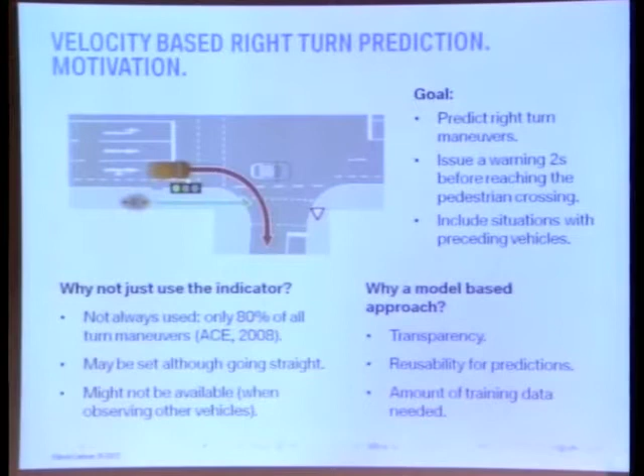Now, there have been a couple of works focusing on this issue in past years. However, the important point is that, in contrast, we would like to include situations with preceding vehicles into our considerations. If you have a preceding vehicle, its velocity profile will influence our own, thereby making the task of velocity-based driver intent prediction much more challenging.

Now, you might wonder, why do we care about the velocity profile in the first place? Why not just use the indicator? Well, as a study of the Auto Club Europa in 2008 has shown, in Germany at least, only in 80% of all cases is the indicator set for turning maneuvers. Also, the indicator might be set although the driver is actually intending to go straight. So the velocity profile could be used to detect this discrepancy.

And last but not least, the indicator signal might just not be available, which is the case if we want to reason about other vehicles that we can only observe from the outside.

Also, you might wonder why we chose a model-based approach rather than a support vector machine or a neural network. In fact, we're using both in other applications, and they are certainly very powerful machine learning tools. However, they also have weaknesses, which is their lack of transparency, and that the results we obtain cannot be used to make predictions about the future as easily as with an explicit model.

Also, I talked about including a preceding vehicle into our considerations. So if we have all the possible trajectories of a preceding vehicle and all possible trajectories of our own, we've got a very big space of possible inputs to our system. So we would need a lot of training data for a non-heuristic model to generalize well to arbitrary situations.

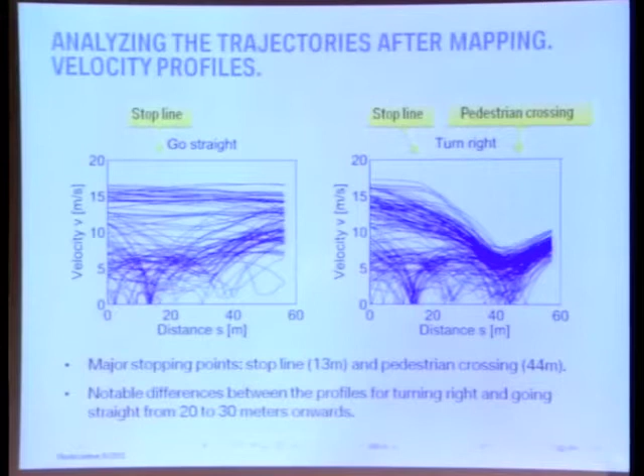In this context, we are using the intelligent driver model first published by Treiber, Hennecke, and Helbing in 2000. It basically models driver behavior using two terms. One is characterized by a maximum acceleration parameter A, the actual velocity V, and a desired velocity U, corresponding to free driving behavior. The second term models car following behavior, characterized by a desired gap D star and the actual gap D with respect to the preceding vehicle.

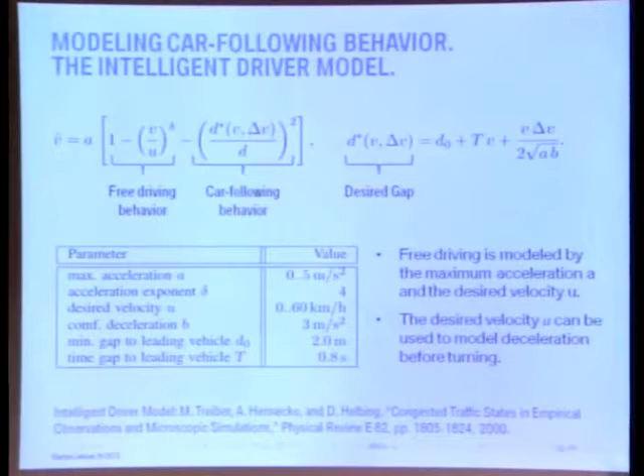Now, in a typical instantiation of the model, the desired velocity U is a constant. For our purposes, however, we need the desired velocity U to model the turn-related deceleration of the driver before doing a right turn. So what we do is take the first term of the equation and rewrite it to obtain a desired velocity profile that is dependent on our distance variable s.

Using a single sample trajectory that characterizes typical driver behavior, like the one here, we can obtain the desired velocity profile for this trajectory. As you will notice, we need the parameter A, which can be estimated based on the acceleration phase after completing the turn.

So now you might wonder, what do we need the desired velocity profile for? As it turns out, desired velocity profiles generalize very well to arbitrary situations.

Let's say we take a virtual zero velocity obstacle and place it at the stop line of the traffic light. Then we start a simulation using the IDM equation starting with 8 meters per second, and what we get is a red trajectory here. Once we reach velocity zero, we remove the obstacle, and we get the second part of the red trajectory. If you compare this with trajectories we actually observed of vehicles stopping at the traffic light, it matches very well, although the desired velocity profile used for this simulation has actually been obtained from a completely different trajectory.

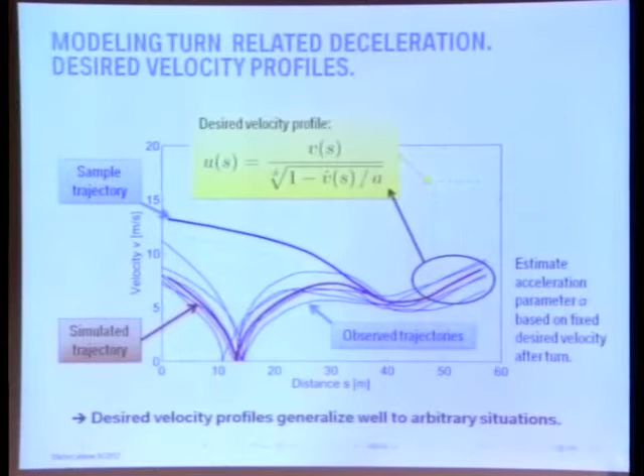Now, of course, we didn't just use one single intersection crossing to obtain our driver model. Instead, we used 50 right turn maneuvers. For each of them, we calculated the desired velocity profile and the corresponding parameter A, and we clustered them using k-means into 3 different driver behaviors, each with their own distribution of the parameter A.

As you will see, we used 4 different driver intents: one for going straight, one for stopping at the stop line of the traffic light, one for turning right, and one for turning right but stopping before crossing the intersection's pedestrian crossing. Altogether we got 24 hypotheses, each corresponding to one of those intents and a set of parameters.

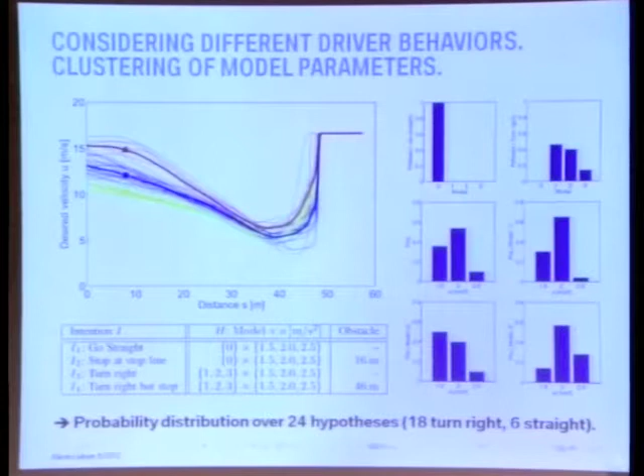So basically, having those intentions and hypotheses, the problem of driver intent inference boils down to calculating probabilities for each of those hypotheses, given a not yet defined observation O. The reason I haven't defined this observation yet is that there are a lot of different possibilities for how to define it. In this paper, we investigated two of them.

For the first one, we'd like to rewrite the probability for a hypothesis given the observation as a product of the prior probability for this hypothesis, which can be obtained from the statistics of the previous slide, and some term which is basically the likelihood of our measurement given the hypothesis.

So what we can do now is use a simulation-based approach. Starting from some point in time, let's say when we reach a distance of 30 meters, we go back in time for 1 second, consider the velocity and distance values at that point, and then start a simulation from 1 second in the past up to the current point in time for each of the hypotheses, which you see here. Then we take the final values and calculate the probability of our observation based on the distance between the final value and our actual driver behavior, which can also be seen as a bivariate Gaussian distribution.

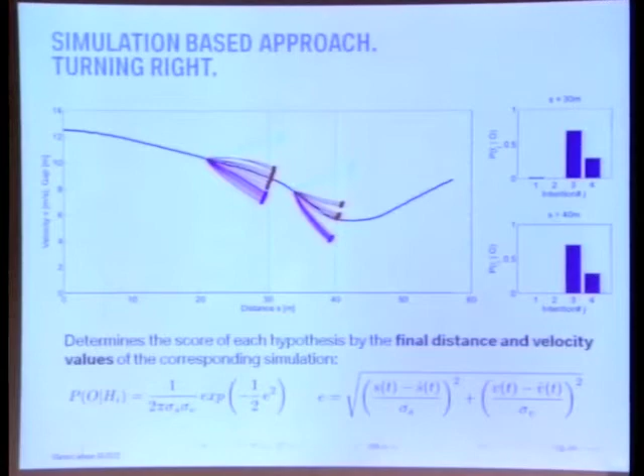Now it's much more complicated when you look at the case of a preceding vehicle. The black line indicates the gap between our own and the preceding vehicle. As you can see, we're approaching the stop line of the traffic light. We both have to wait in front of the traffic light, and then we accelerate. I'm following my preceding vehicle, and finally, the preceding vehicle turns right, and we can accelerate so as to go straight.

Now, what you can see in the simulation runs is that for a distance of 28 meters, all the hypotheses, or the simulation results for all the hypotheses, actually look the same, which is because our own driver's behavior is dominated by that of the preceding vehicle.

So it's actually not possible to say anything about his intents, which is reflected in the probabilities we see above. On the other hand, if you look at the simulation run for 36 meters, then the preceding vehicle has turned.

We have no preceding vehicle anymore. The driver is accelerating, and the only hypotheses that fit this behavior now are the hypotheses that correspond to the intent of going straight, which is reflected in the simulation results. Again, we have a very high probability for going straight.

So to put all this together, as you can see, this approach is able to express ignorance in situations where it's just not possible to say anything about the driver's intent, but still it's possible to say something at a certain point of time, to a certain extent.

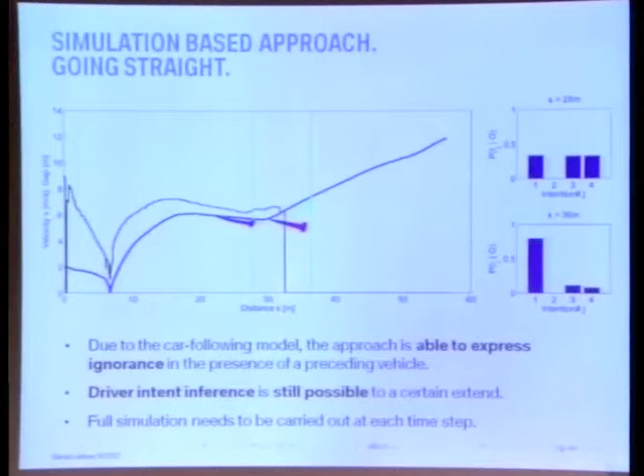And this is the so-called comparison-based approach. The comparison-based approach simply compares the values that we observe, the acceleration values that we observe, with the values we get from the IDM model. And it does this at every time step.

So for each time step, we get a separate observation O, which, because it's a time series, depend on each other. So actually, we don't want to model this as a complete Bayes net, because we have all these interdependencies that would be very complicated.

Instead, we consider just a naive Bayes net, and we model the probability for a given hypothesis as basically the moving average of the scores for the individual time steps weighted by the prior probability for this hypothesis. And it turns out that this approach is much, much faster because the constituent scores can be reused all over again.

As it's a moving average, we only have to compute the newest score for the newest values of our acceleration. And also, it's more robust with noisy sensor data, because if we have a false positive detection of a preceding vehicle on only one time step...

...then the influence of this time step is just influencing our overall probability by a factor of 1 over n.

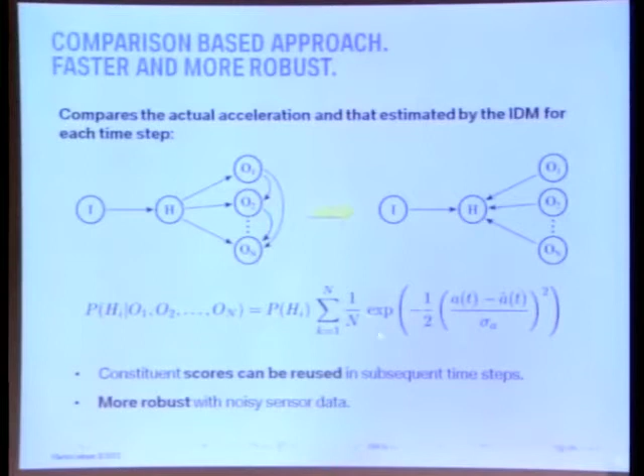Comparing the two results, we see that they basically deliver similar results, and that even at very, very low false positive rates, we can still...

...classify around, or detect around, 50% of our right turn maneuvers in the presence of a preceding vehicle, while obtaining a perfect score, you can't really see it, in the case of no preceding vehicle.

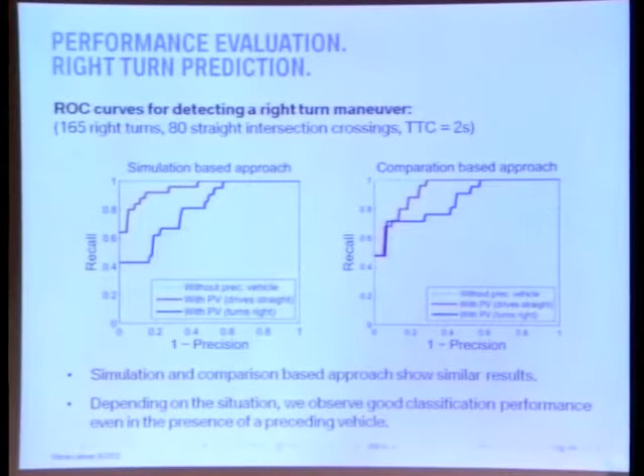Another interesting aspect of using an explicit model, as I said before, is that you can do predictions about the future.

In the simulation-based approach, we simulated the driver behavior for the time interval of 1 second ago up to the current point of time. So there's nothing to stop us from simulating the driver behavior from our current point of time up to 2 seconds in the future, so as to see whether we can reach the pedestrian crossing within this 2...

...seconds. So this is very important if you want to design a driver assistance system, because the driver assistance system has to decide at some point to issue a warning.

So it's not possible for this situation to use a constant velocity-based approach, because the driver is going to slow down before the intersection.

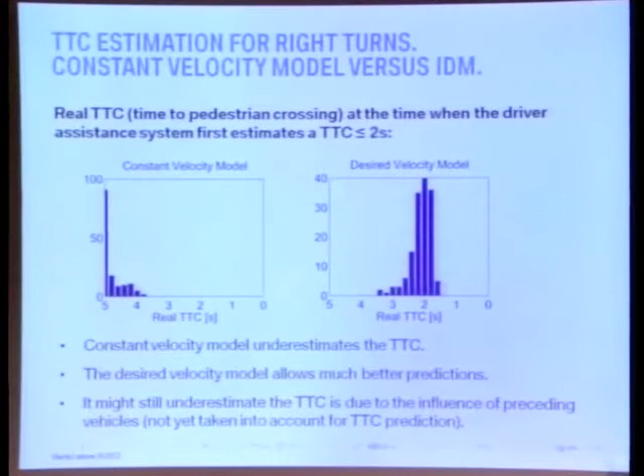To sum up, I introduced an IDM-based approach to driver intent inference, which is very simple and real-time capable.

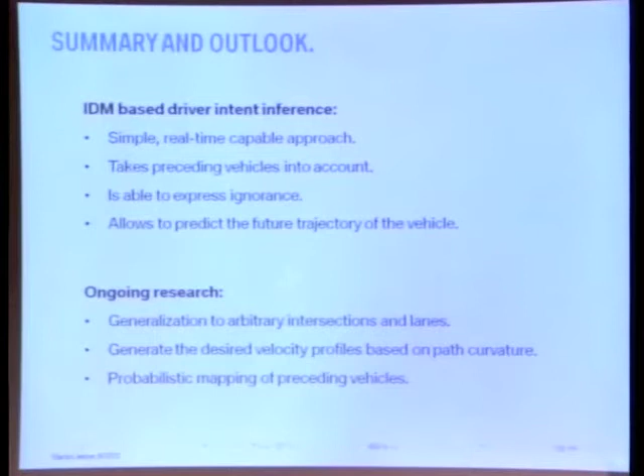It takes into account the preceding vehicles, and it's able to express ignorance in situations where it's just not possible to say anything about the driver's intent based on the velocity profile alone, which is important if you want to...

...combine this approach and include other features like the indicator. Also, it allows us to predict the time to collision, which is important for the design of driver assistance systems.

Ongoing research focuses on the generalization to arbitrary intersections and multiple lanes, and how to generate the desired velocity profiles based on the path curvature.

Also, we would like to have a probabilistic mapping of the preceding vehicle. Sometimes the preceding vehicle is somehow between the 2 lanes, so if you do a deterministic approach, then you might get the wrong results.

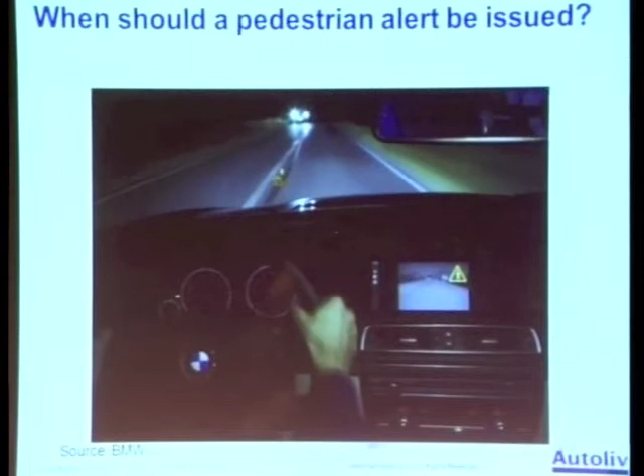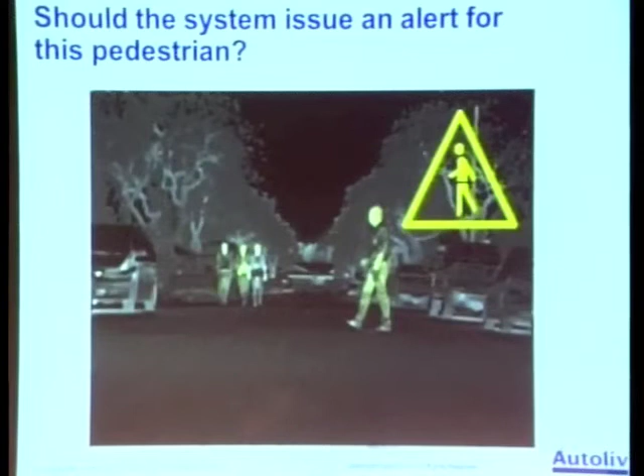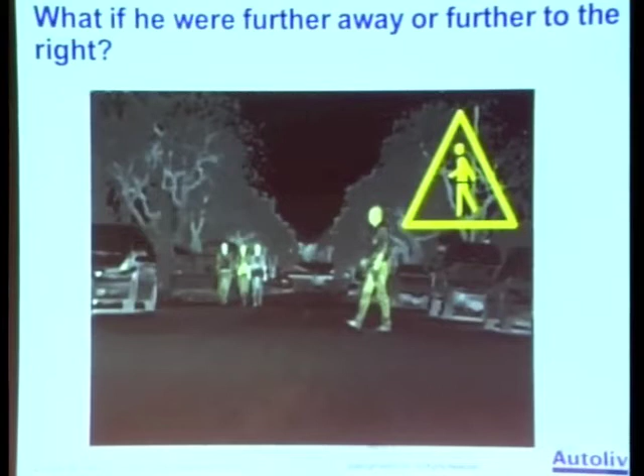Should a system issue an alert for this pedestrian? Or this pedestrian? What if the pedestrian will be further away or further to the right? Would you still issue an alert?

There are different systems on the market. I just take here two examples. Daimler introduced Night View Assist Plus in the E-Class in 2009, and BMW introduced what we refer to as Night Vision 2 with the 7 Series in October 2008. They have different characteristics, but the main thing here is that they both recognize and detect and warn for pedestrians.

The functionality of the system is that you have a camera. You have a camera here up in the corner. In this case, it's a far infrared camera.

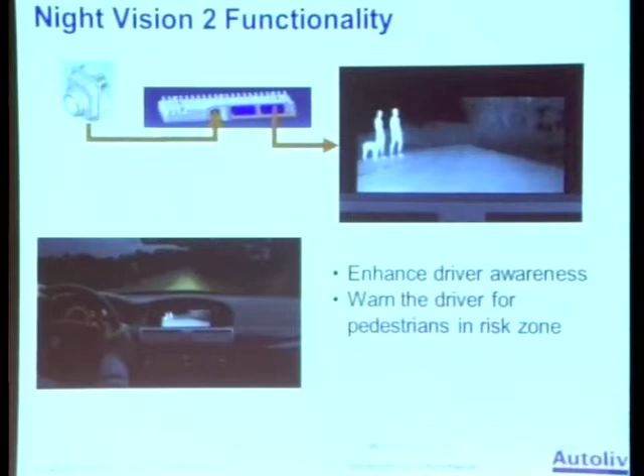You have a camera, you run it to a computer running some image processing, and it's out to a display. Of course, here in the BMW, it's a display in the center console. The system is there to enhance the driver awareness of the situation and also warn the driver of pedestrians in the risk zone.

And when such pedestrians are recognized, they are marked in various ways. Here I boxed them, but you can also highlight them by coloring them in, and you issue a warning. The question here is, what is the risk zone? And that's what we have studied here.

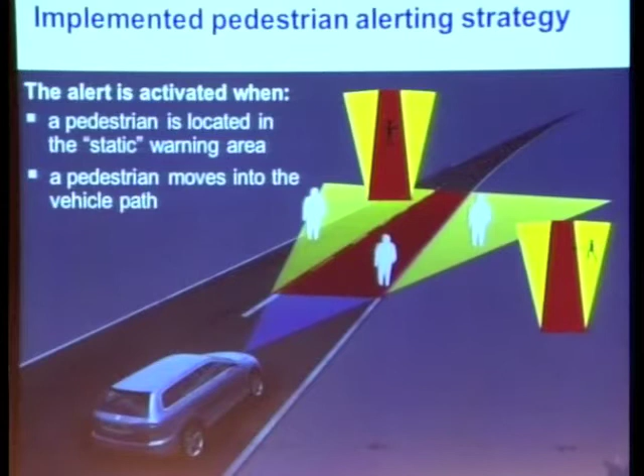There is an implemented pedestrian alerting strategy that I started from. The alert is activated when a pedestrian is located in the static warning region, the red zone, meaning that the pedestrian is straight in front of the vehicle's intended path. But you also issue a warning if a pedestrian moves into the vehicle path from the yellow zones here, so they would be in the vehicle's path when the vehicle is about to enter that area.

The warning parameters are also adjusted speed dependent, and I think that they are all perfectly logical. I started off here with more assumptions of how to define the width and the size of the red zones and the yellow zones, and how the transition is looking. That was my initial assumption.

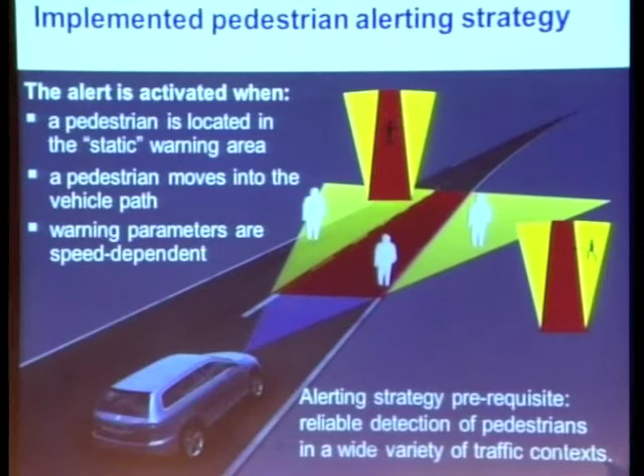Of course, here in alerting strategies, the prerequisite is that we assume perfect detection. That's of course an ideal situation that we are not quite there yet, but here we are assuming perfect detection. What do you do once you have detected the pedestrians accurately? And how do you then issue an alert in a wide variety of traffic contexts?

Context may influence alerting criteria. The appropriateness of alerts may depend on the driving context. Drivers may rate favorably in alarming situations even when they were able to avoid the accident without an alert. And we suggest that alerting strategies must take into account this aspect, that the contextual factors shape drivers' attitudes towards the situation in which the system issues an alert.

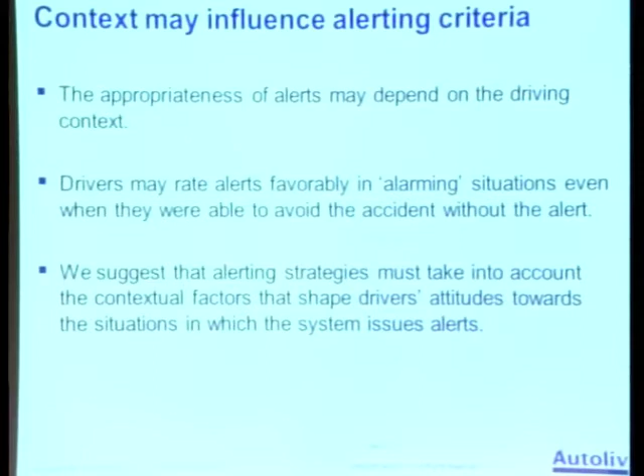And the challenge then is to define adequate activation criteria. Here we have a pedestrian on the road, and the system decides to issue an alert in this case. If you fail to issue an alert when alert is justified, you have an immediate accident risk, and of course we want to avoid that.

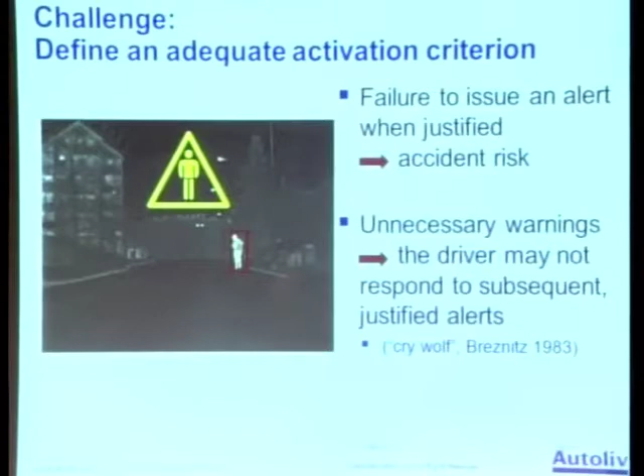But if you issue an alert that's considered to be unjustified or unnecessary, even though it's a perfectly valid detection, you run the risk, if you have repeated such warnings, that the driver will fail to respond when he or she really needs to respond. And it's generally referred to as cry wolf, and you have a good reference there.

The issues and research questions we have here are: when should the pedestrian detection system issue an alert or warning in order to gain driver acceptance? And can we demonstrate the utility of a method that uses drivers' subjective acceptance as a criteria to guide the development?

So basically we turn it around. Instead of trying to define an objective criteria that can be difficult to see, because most people will very rarely experience a situation with immediate risk of hitting a pedestrian, most of our experience with the system is situations that might develop into an accident. So we suggest it's more appropriate to look at how you gain acceptance for those situations.

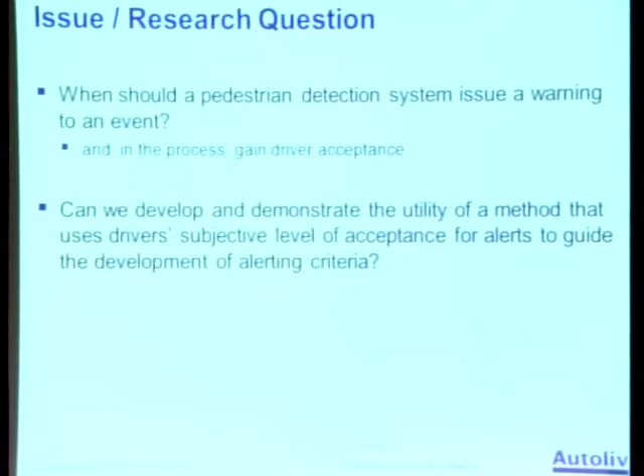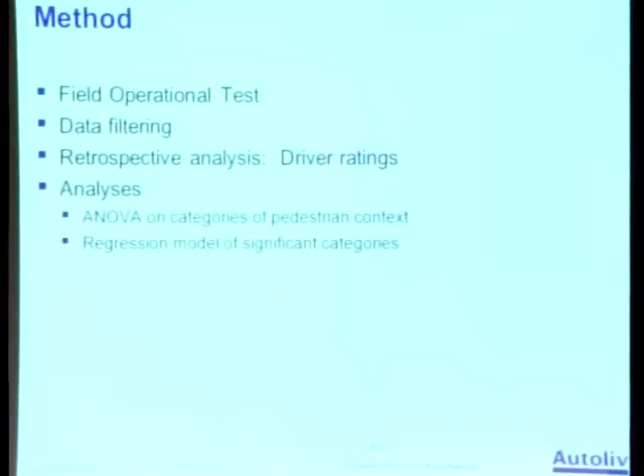So you're basically using a subjective criteria to see if that can guide us in defining objective alerting criteria. The methods we used were a field operational test, data filtering using a retrospective analysis to gain driver ratings, and then ANOVA analysis and regressions on that data.

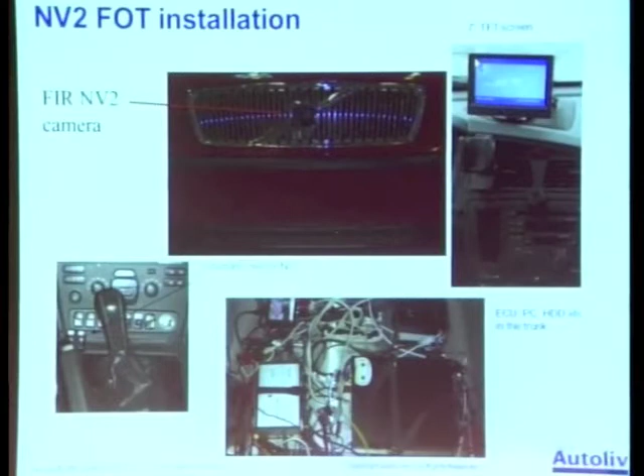The field operational test was basically to put the system into a number of vehicles we had available. They were retrofitted - in this case it was a Volvo, and since there were no such systems, we had to put a special add-on screen. We threw the PC and some other data acquisition equipment in the trunk, and then we started to record systems, recording actual pedestrian encounters in the field.

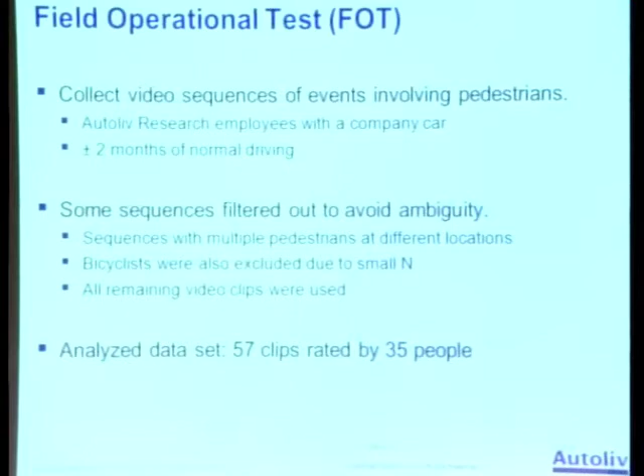We used company employees that had a company car, and in this first set we had roughly 2 months of normal driving. We took all the sequences we could get, but some had to be filtered out because of ambiguity - for instance, pedestrians at 2 different locations in the same event, where you don't know which pedestrian to rate or if there was a combined effect. We also excluded bicyclists since we didn't have enough data to do a separate analysis, assuming there would be different risk criteria for bicyclists compared to pedestrians. We used all remaining clips, which ended up being 57 clips, and we used 35 people to rate them.

The retrospective analysis involved having volunteers watch and rate each clip one at a time. The clips were randomized, of course, in order to avoid any sequence effects.

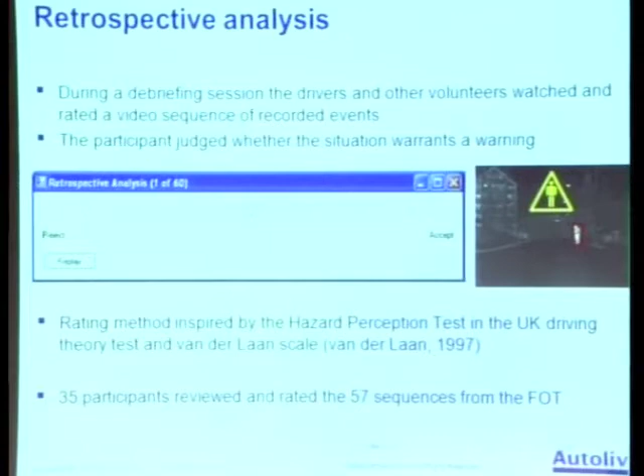We asked a very simple question. We showed the clip, and when it stopped, we showed the screen with the question: do you want to have an alert or not in this case? How do you accept it? If you definitely do not want to react, you move the mouse to indicate you do not want an alert in this case whatsoever. And if you definitely want one, you do the opposite.

Most of the situations, however, were not so clear. It wouldn't have been a good experiment if all were accept and all were reject. So most of them were somewhere in between.

The method we developed is inspired by the hazard perception test used in the UK driving test, and also the Van der Laan scale, but simplified to be only one scale. All of the participants rated all the sequences.

For drivers and the lab subjects, we separated those that had been driving with the system from those that hadn't driven with the system, to see if there was any difference.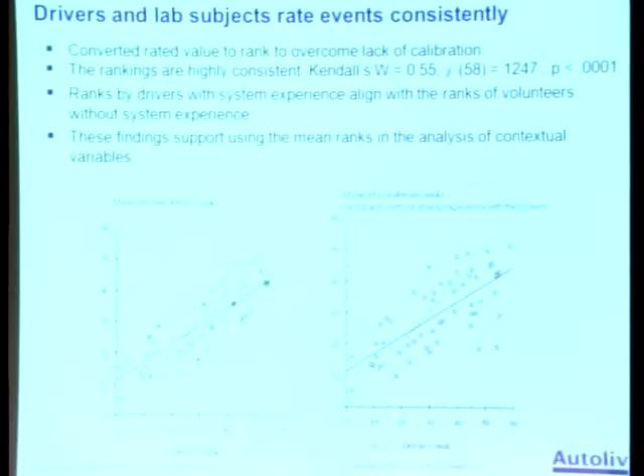Ranks from drivers with system experience aligned with the ranks of volunteers without system experience, which is important because it makes it easier to recruit people for this rating. These findings support that we can use the mean ranks in the continued analysis as a desired outcome.

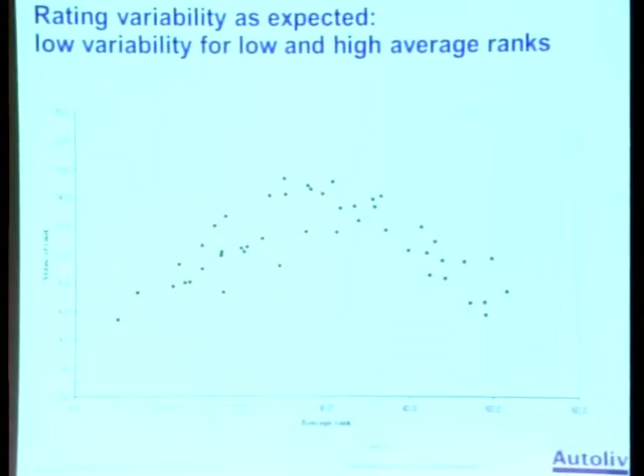We can also see here the standard deviation on the y-axis, and here the average rank. So the case of these 57 sequences that was ranked the highest, and so forth. It's expected that events that were in between had more variability than ranks generally ranked very low or very high, which is another good confirmation of the data collected.

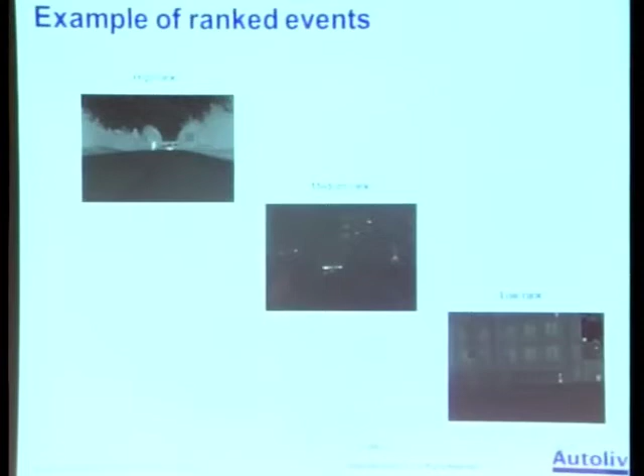Examples of ranked events, of course still images. Here we have a high rank. It's a pedestrian. There's a car coming at about 90 kilometers per hour, and there's a pedestrian dashing over the road. If the pedestrian would slow down, you would hit them, but the pedestrian doesn't slow down here. It's difficult to know at the time when you issue the alert for the driver, and it was very consistent.

Here is a medium rank one. There's a pedestrian coming to a zebra crossing. The projector doesn't generally give very good credit to some of the images here in black and white. There's a car in front, and if the car in front doesn't slow down, and if the pedestrian keeps his pace, we will pass before the pedestrian comes here. But if the car in front slows down, or if the pedestrian speeds up, we would have to brake for him. So it was kind of indecisive, and it was also very consistent to be medium rank.

Here you have a pedestrian in the middle of the road, which would be in the red zone I showed in the beginning. But people consistently saw that the road is curving and the pedestrian is actually on the other side of the road. On the original images, we didn't do it with this type of projector, so it was more clearly seen with the quality of the image where the pedestrian was.

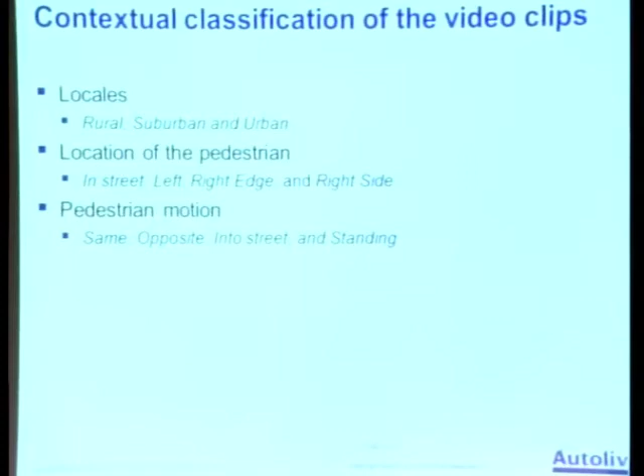We then classified and annotated them according to a number of criteria we thought would be useful and has been discussed in the past. Locale: we rated whether they were rural, suburban, or urban. Urban had to be continuous buildings. Suburban was not continuous buildings, but we used street lights as a criteria. Rural would be, of course, no street lights.

We also used the location of the pedestrian, whether they were in the street, on the left side of the road, on the right edge of the road meaning on the road but on the edge, or on the right side meaning on the sidewalk or beyond it. We also categorized motion, whether they were moving in the same or opposite direction of your own vehicle, whether they were moving into the street, or whether they were standing.

We could then conduct non-parametric ANOVAs on this, because it's on ordinal scales. We found that pedestrian location, pedestrians in the street were ranked high, and also on the right edge, and they were highly significant. Pedestrians moving into the street were ranked high, but also pedestrians standing, since pedestrians standing near the side of the road can at any time walk out into the street. So they were basically rated in the same way.

There was actually a difference between whether the pedestrians were walking in the same direction or the opposite direction. We think there are other factors we need to separate in this, so we are doing another study with more participants, to separate them into more categories. We think it co-varies with something else. It doesn't co-vary with moving whether you are on the left or right side of the road, because they were roughly balanced.

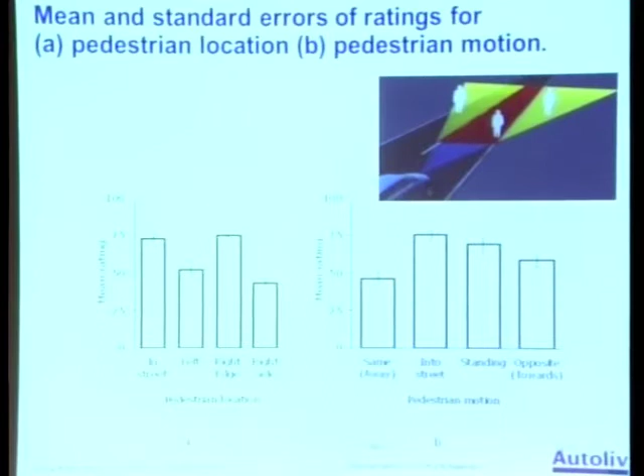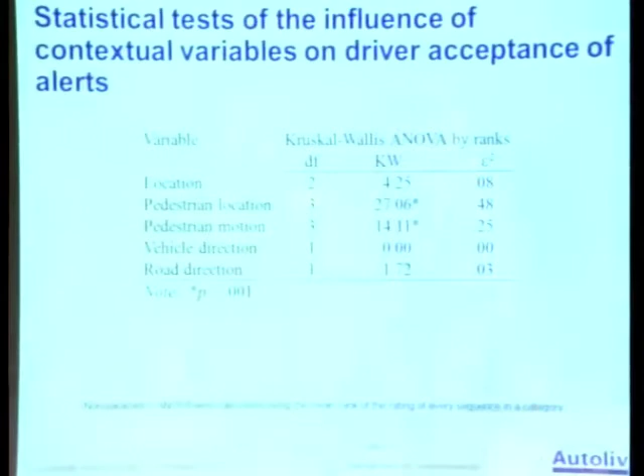Those with an asterisk are significant at 0.001, so it's a very nice significance. We could then generate the best fit linear model of this. The rating has an intercept, and then a high value for location, and location was set to 1 whether you were in the street or on the right edge, and set to 0 if that wasn't the case. We use minimum velocity, and then minimum x direction, meaning the distance in front of you.

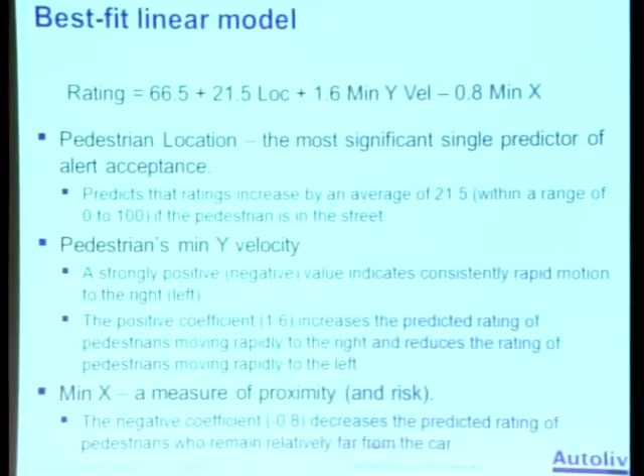So the location was the most significant single predictor of alert acceptance - if they were in the street or on the right edge. Minimum lateral velocity may need some explanation: a strong positive value indicates you're going from left to right. If you were moving rapidly from left to right, you increased the rating. If you were moving rapidly from the right, from your near edge - this was done on right-hand driving - then you decreased the value.

That means if you're on the left side and you move rapidly, you have enough speed to be in the way of the oncoming vehicle by the time it arrives. But if you're on the near side, you actually have time to dash out of the way before the vehicle gets there. Minimum X was also used, and the negative coefficient there means that the further away the pedestrian was, the lower the risk. But you see, it's not a very high weight.

Otherwise, one would assume that the X distance, or the distance in front of the vehicle, would be very important. The 3 parameters explain about 61%, R squared is 0.61 of the variability, and that's a strong result when you're explaining human judgment. There are probably additional parameters we have to look for that would increase the model's validity even more.

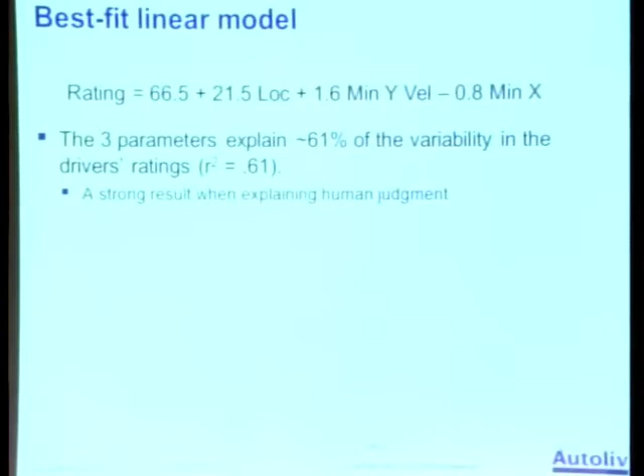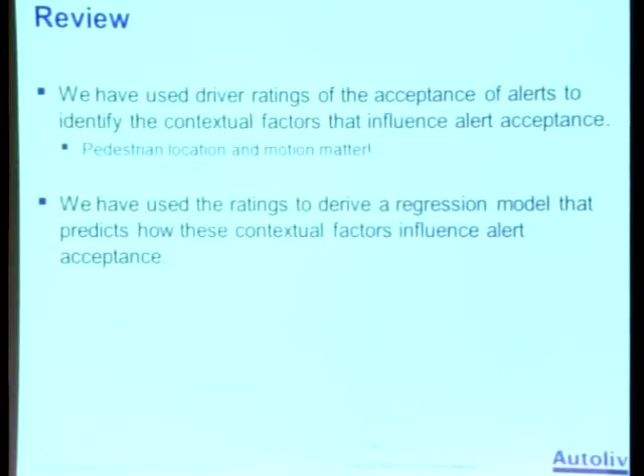So in review, we have used driver ratings of the acceptance of alerts to identify the contextual factors that influence alert acceptance, and pedestrian location and motion does matter. We have used the ratings to derive a regression model that predicts how these contextual factors influence alert acceptance. Our method shows how you can leverage the scarce and expensive FOT data within the confines of the laboratory.

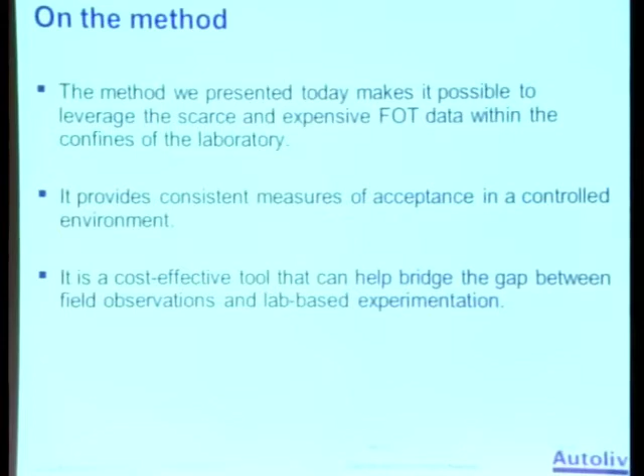So we could actually use the data - each FOT data is unique - and replicate them within a subject study in the lab, which is very important to reduce the cost of this type of exercise. It provides consistent measures of acceptance in a controlled environment. It's a cost-effective tool that can help us bridge the gap between field and lab-based experimentation.

So, lessons learned - what does it mean for our alerting criteria? Well, an alert should be given when the pedestrian is in the middle of the road or at the right edge. I called this the green zone - it was initially yellow, but turned out to be more greenish. So in the green zone: moving rapidly from the left side into the street - the size of the arrow indicates the velocity of the pedestrian - or on the right side and moving slowly into the street.

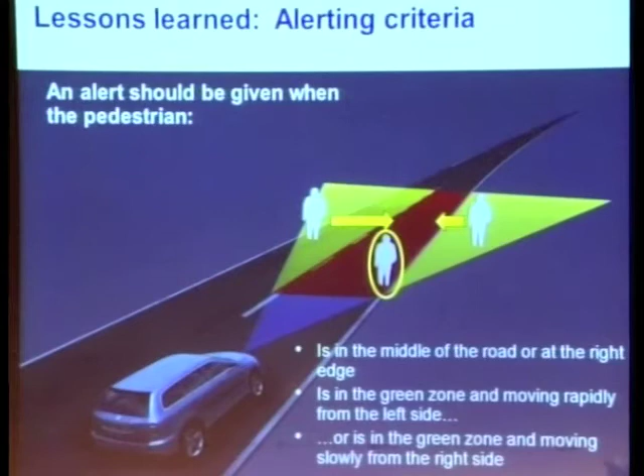And I think this all makes sense. Again, the criteria we started off with was, in my opinion, very sound and logical, but when you see this, well, this also makes sense. This is a way of refining it in a way we didn't have any evidence for before we had done this study.

So it also means that we have intuitive results, and that also adds credibility to the method and the results.

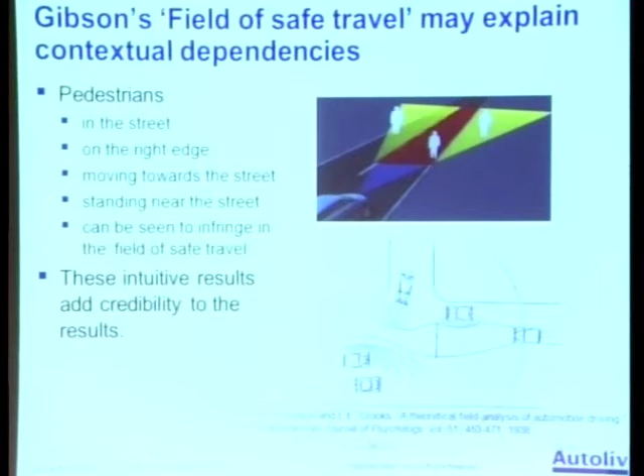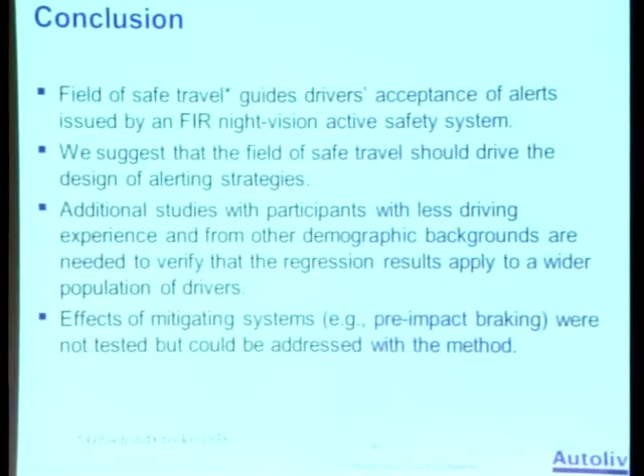So in conclusion, field of safe travel should guide drivers' acceptance of alerts issued by, in this case, a far infrared night vision system, but it is probably extended to all types of pedestrian detection systems - it hasn't been tested though for all types. We suggest that field of safe travel should drive the design of alerting strategies. Additional studies with participants with less driving experience and from other demographic backgrounds are needed to verify that the regression results apply to a wider population of drivers.

And the effects of mitigation systems, for instance pre-impact braking, were not tested, but could be addressed with the method. And by that I close, and if you have any questions, I'd be glad to answer.

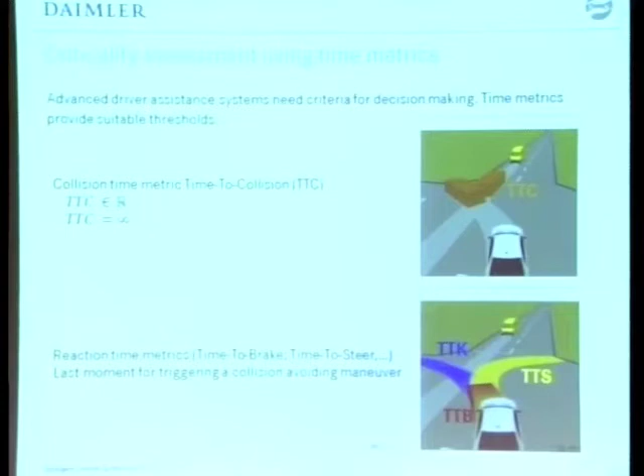For the last speech today, I will present you a novel approach for the probabilistic computation of time to collision. So, as a quick reminder, I will present time metrics which are good criteria for criticality assessment. The first time metric is time to collision, and there are also other time metrics such as time to brake and time to steer, which represent the last moment for triggering a collision avoidance maneuver.

So if we consider non-probabilistic systems, we just use a single-valued state for the objects, which leads to a crisp value for the time metric. Here, as an example, TTC has just one value, and the reaction time metric TTR also has one value. And this can lead to unrobust behavior, as shown in this video.

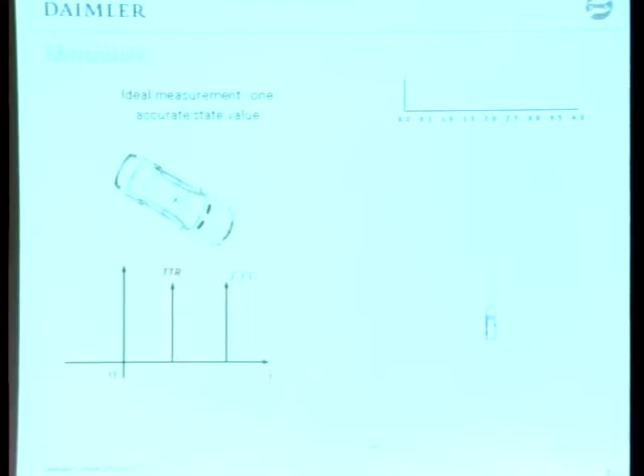So what's displayed here is an actual measurement. On top, you see a graph with the evolution of the time metric, and the red, yellow rectangle is a measured object acquired with sensor fusion, and here you see the ego vehicle. And here a collision is detected, and the avoiding maneuver is also displayed here.

And in that case, after a few seconds, the collision actually disappears and then comes back again. And if you consider the situation, if the yellow vehicle was further left by a few centimeters, let's say 50 centimeters, then the collision wouldn't disappear, and the difference between the two situations is not so big. So it's kind of an unrobust behavior.

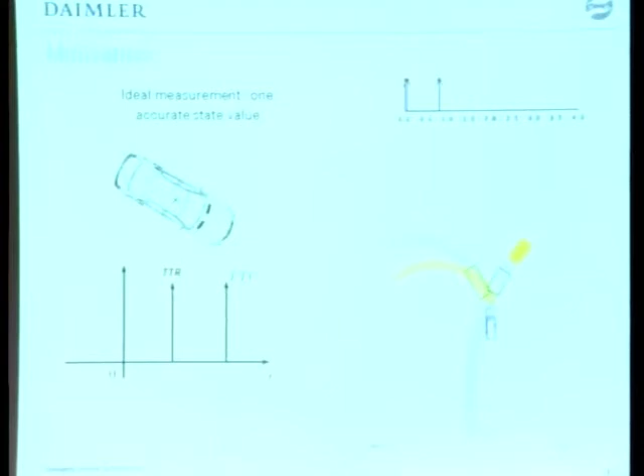And another focus for this new method is also to account for the restricted computation resources in advanced systems. So in the design of this method, there was a big effort on efficiency.

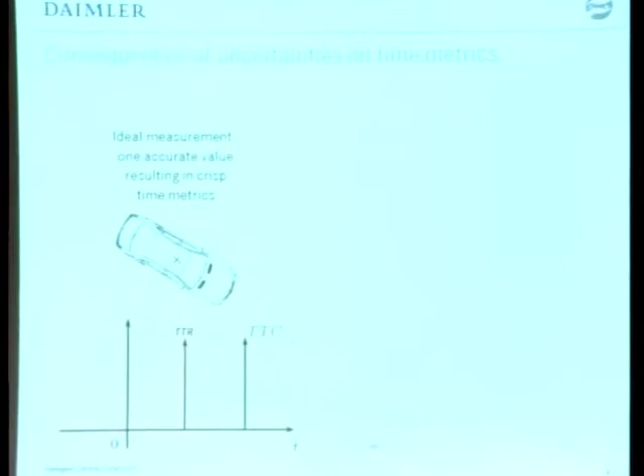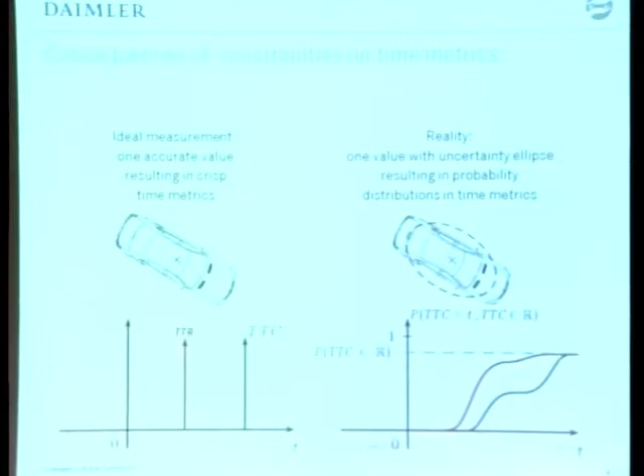So here again, let's take a look at the consequence of uncertainties on the time metric. On the left, you can see the crisp values for single-valued states. And if you consider the uncertainty about the states, the time metrics are transformed into a probability distribution. And this probability distribution is also scaled with the collision probability. So computing this collision probability is also an important step in determining the distribution probability for the time metric.

So this is why I will present the method for computing the collision probability. I already presented this method last year, so I may go quickly, but I present it again because it's really important for the next computation. So in order to compute the collision probability, we introduced a distance function in the time to collision computation algorithm with the following characteristics.

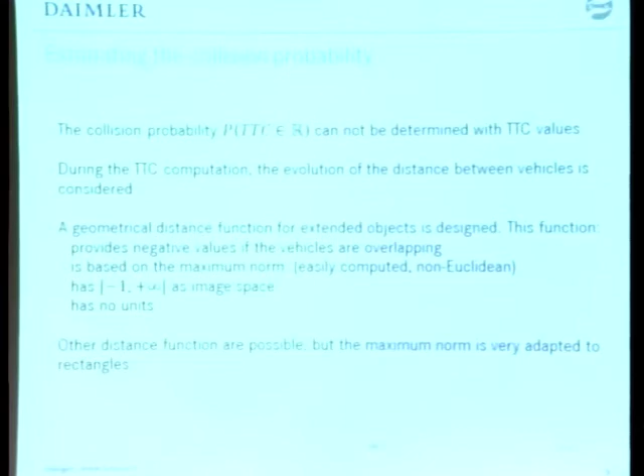So the distance function provides negative values if two vehicles are overlapping, meaning they have collided. This function is also based on the maximum norm because it's easily computed and adapted to rectangles. As a consequence, this distance function ranges from -1 to +infinity.

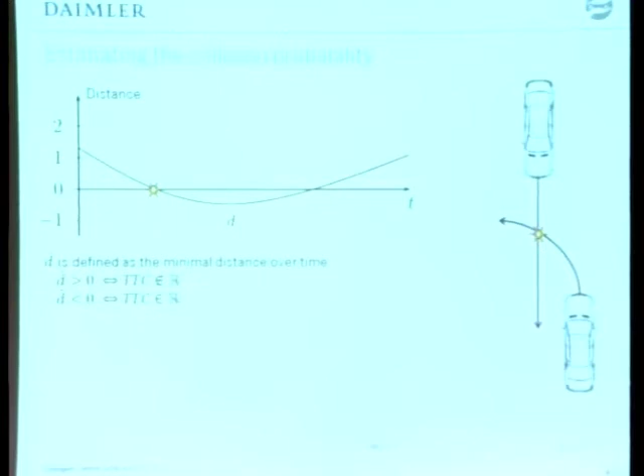If we take a look at the situation, on the right I've depicted a crossing situation with two trajectories displayed, and on the graph on the left you can see the distance evolution over time between the two vehicles. In case there is no collision, so the distance minimum, symbolized with a small d, remains positive. But in case of a collision, the distance minimum is then negative.

So by studying the probability distribution of this distance minimum, we can also compute the collision probability, because the collision probability is also the probability that the distance minimum is negative.

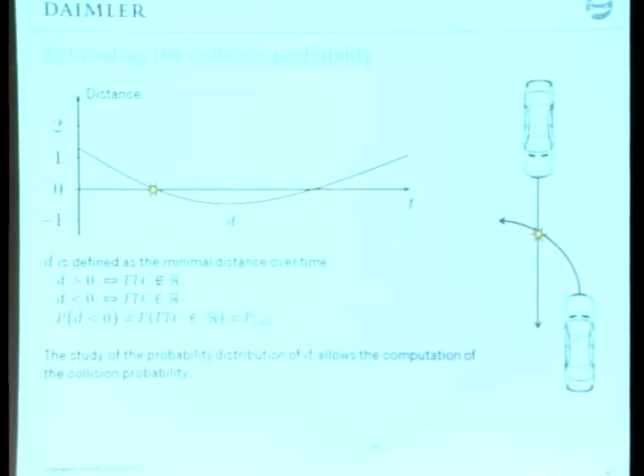So first of all, we take an object with a state and also an uncertainty about this state, represented by the covariance matrix sigma. And we want to study the probability distribution of the minimum distance.

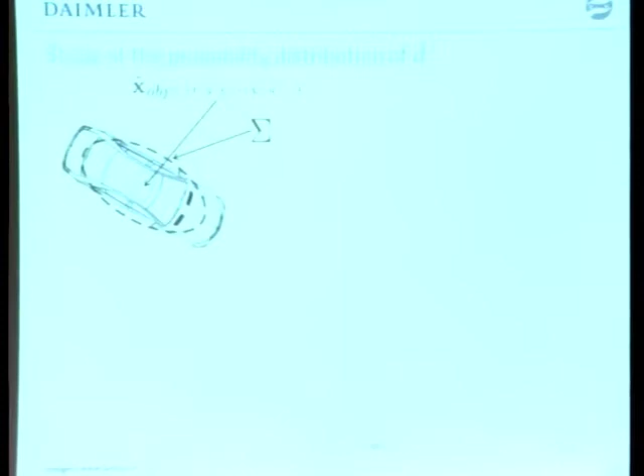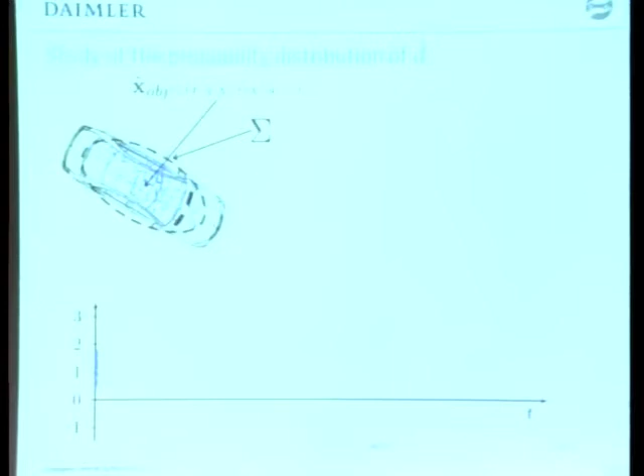So for that, we first make a Monte Carlo simulation, only to know how the distribution looks like. So we draw thousands of samples, and for each sample, there is an initial distance displayed on the left. Also for each sample, we perform a TTC computation, which gives us distance evolution curves, and for each curve we can also get the minimal distance.

So for an online assistance system, the Monte Carlo simulation is a bit of a no-go. So we used an approximation method, the Unscented Transform. Some of you may know it from the Unscented Kalman filter. So we just compute a very few samples deterministically, depending on the state and the covariance matrix.

And for each sample, we perform a TTC computation algorithm. Each sample leads to a distance minimum value, from which we can compute the mean and the variance. Using the model we isolated from the Monte Carlo simulation, we can approximate the distribution very well. Then by integrating from -1 to 0, we can also compute the collision probability.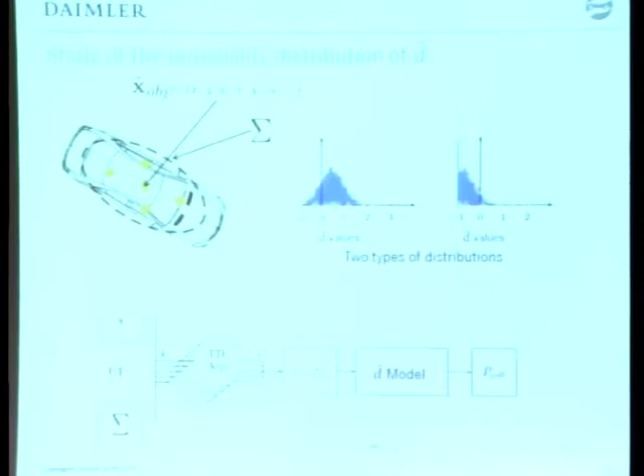So now the question is how to approximate this curve, which is the actual probability distribution of TTC. If we consider the Bayes' rule, we can split this equation into two members. On the right, the collision probability is already known, and we just have to find an estimate for the conditional probability.

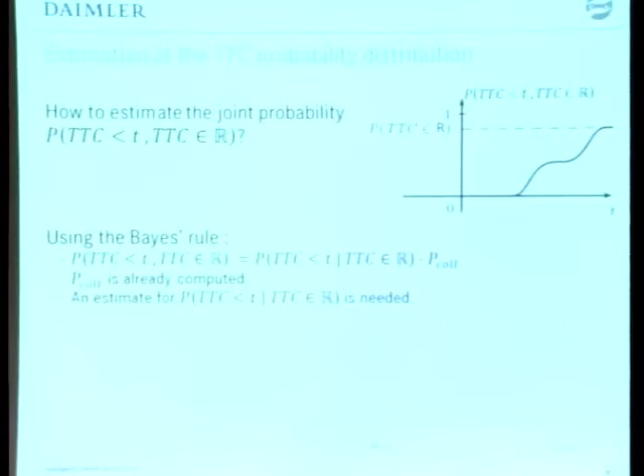So we just have to find an estimate. But the problem is, for example, each sigma point doesn't lead to a collision, so it's hard to compute this conditional probability just using TTC values.

And the trick is to use a pseudo-time matrix, defined as this underline-overline TTC. This pseudo-time matrix equals TTC if there is a collision, and equals the time of minimal distance if there is no collision. Here the time of minimal distance is displayed on the graph, so it's the time when the minimal distance is reached.

And as you can see, the quality of approximation increases with the collision probability, because if we have a high collision probability, then the proportion of TTC values in the pseudo-time matrix is very high. This is also a good approximation because in case of a low collision probability, the approximation error will be minimized when we multiply this term with the collision probability.

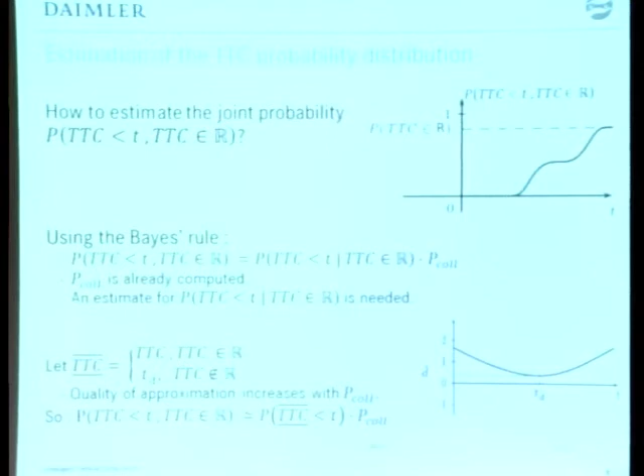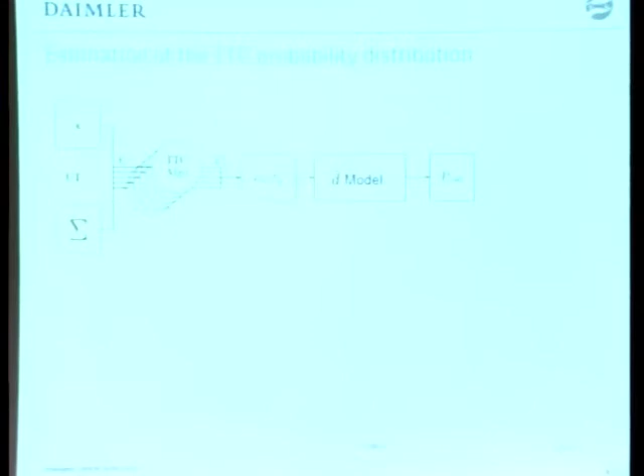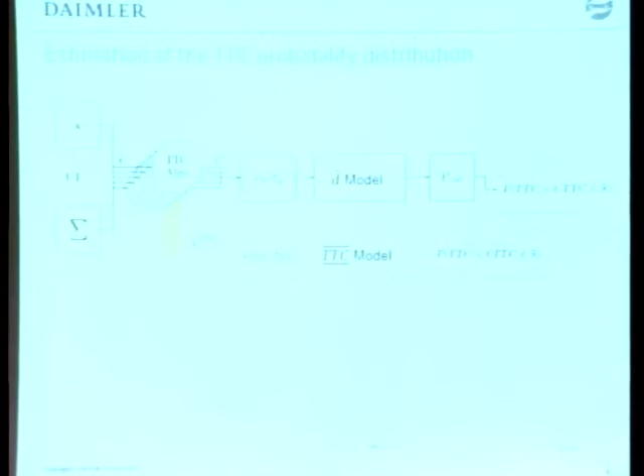So here let's take a look at this flow diagram. You remember it's a flow diagram for computing the collision probability. And here is the overhead for computing the whole distribution of time to collision. So we just have to extract the pseudo-time matrix values here from the computation of the TTC values.

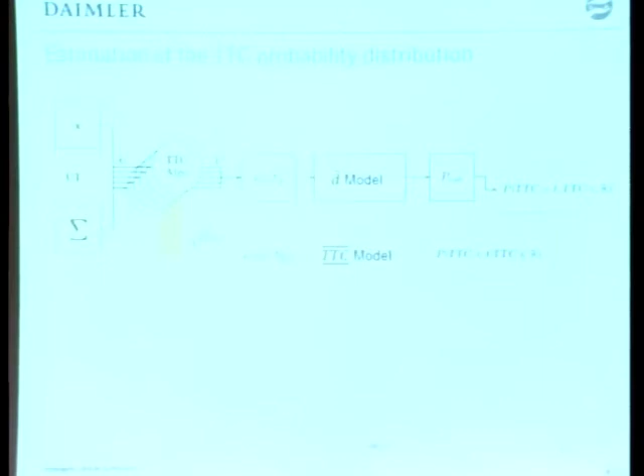Again, performing Monte Carlo simulation, we could compute models for the pseudo-time matrix. Using the mean and variance, we can compute the corresponding parameters from this model and then compute the TTC distribution. The important fact about this graph is that most of the computation is already done, because it occurs by computing the TTC values, also the TTC algorithm, which is already done when we want to compute the collision probability.

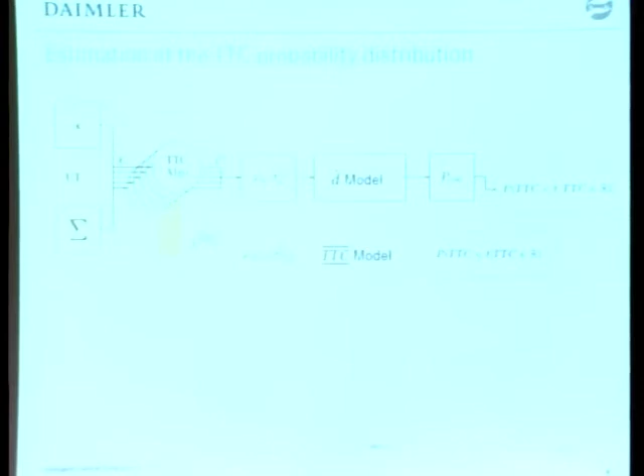And because we introduced a pseudo-time matrix, we don't have to perform any additional calls to the TTC computation algorithm.

So now let's take a look at the results, as a comparison between the non-probabilistic system and the probabilistic system.

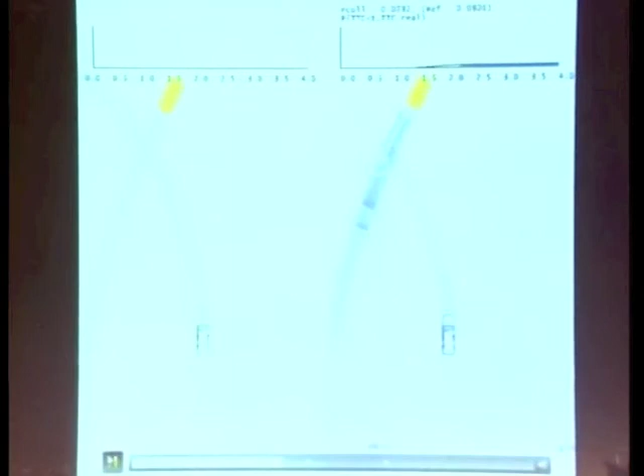Here we come to the part when the collision is detected on the left, and here we also have a collision probability of 98%, while the real collision probability is 95%, so it's a really good approximation.

You can see that here the TTC was about 1.4 seconds, and it actually already begins at 1 second and goes up.

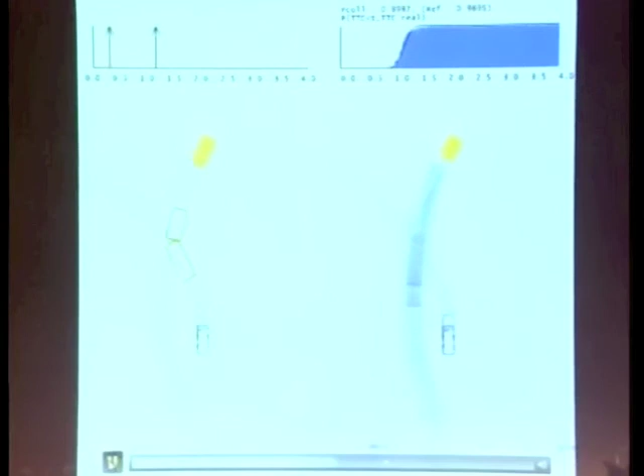Then when we lose track of the collision, because the object is deviating a little bit, you see here that the collision probability is far from zero, it's still 30%. So using this new method, you can increase reliability in your criticality assessment.

So here, when the collision comes again, there is no way anymore to avoid it, and you see it's linear in time, and you have fast 100% collision probability.

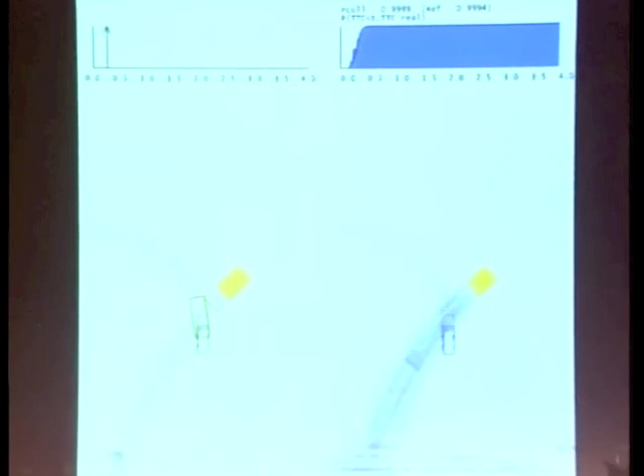As a conclusion, I presented a novel and efficient algorithm for estimating the collision probability, also the probability distribution of TTC. I studied the influence of sensor uncertainties on time metrics, designed a distribution model regarding Monte Carlo simulation, and used an efficient approximation method to approximate this distribution.

I forgot to mention that this algorithm can also incorporate situation-specific sensor uncertainty because it takes the covariance matrix directly from the Kalman filter, and it's regularly updated.

It's also real-time capable, so I made some computation time comparisons. If you use Monte Carlo, the estimation of this histogram took about 1.5 seconds, while using the uncertainty transform it took about 2 milliseconds for a covariance matrix of dimension 6. If you just have uncertainty on the position, it just takes 0.9 milliseconds.

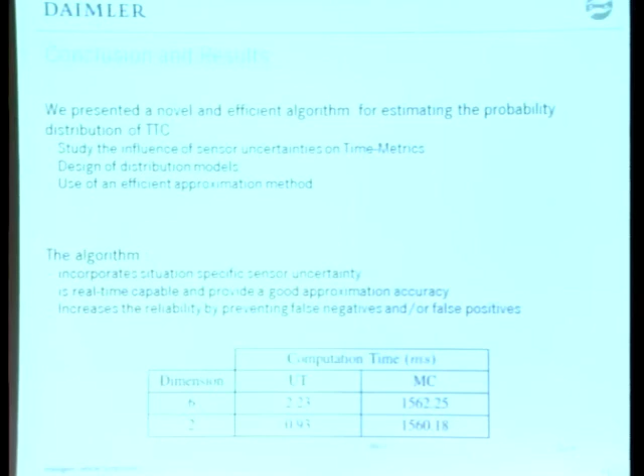For future work, I will extend the presented approach to situations with multiple objects. Here I have made a small example: a crossing situation with 3 objects.

For each object, you can compute the TTC distribution with the method I just presented. But if you want to compute the overall distribution for the whole situation, you have to combine all 3 distributions, like finding out with which object the ego vehicle will collide, in a probabilistic way.

So you have to regard correlation between vehicles in the computation. It's not just the sum of the 3 distributions, it would be too easy.

I will also try to estimate the probability distribution of other criticality metrics like time to brake and time to steer. Thank you for your attention.

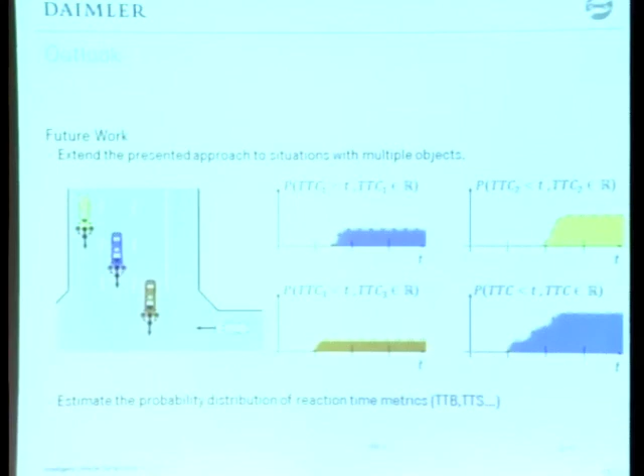We have time for just one question. Anybody in the audience? Yeah, please. Oh, she's coming. Down the left. Could you go one slide back?

This MC, what is that? Monte Carlo simulation.

We had a talk yesterday from a Daimler person about collision avoidance, deciding between braking or trying to evade the car, depending on different factors like speed and so on. But this Monte Carlo thing that would be needed, 1.5 seconds is a long time for such a decision.

Yeah, that's my point. It's not used in the system, it was just used here to compute a reference and find out how the distribution looks like. Once that's found out, it's no longer needed, so in the system it will just be this 2 millisecond approximation.

Is that already, is it still in the experimental phase? It's not yet part of it, it's not yet in commercial use. Okay, thank you for the information.

Thank you, Mr. Bertolone.